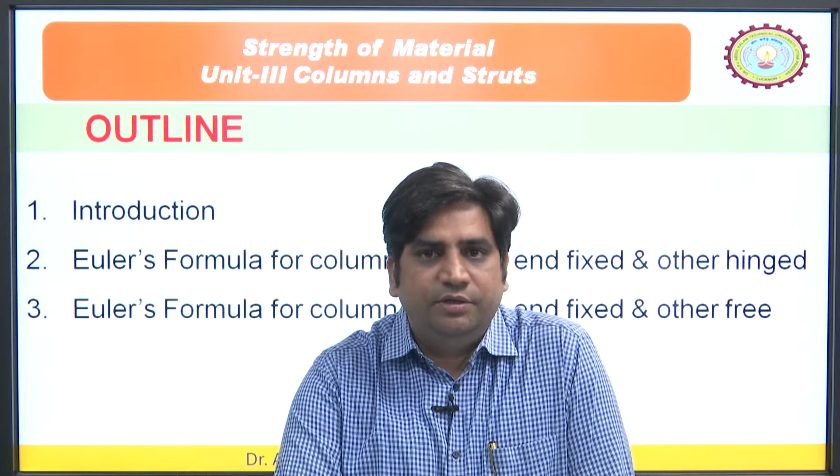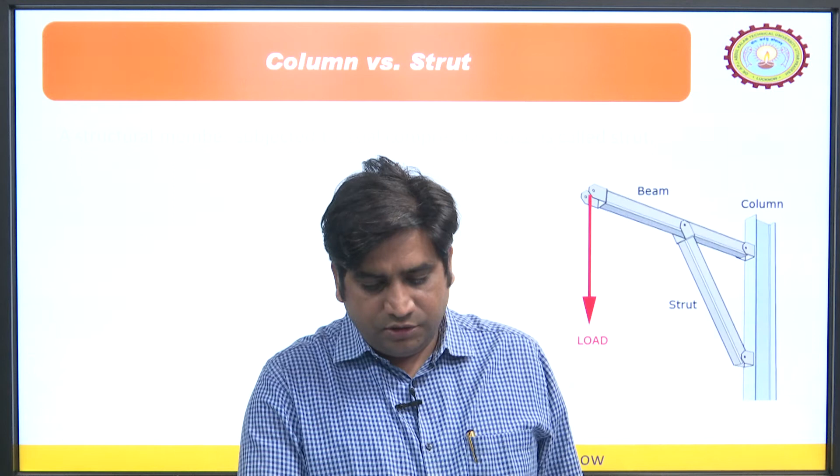As we know, columns and struts are structural members which are subjected to axial compressive force, and if any strut is acting in the vertical direction then we can call it a column.

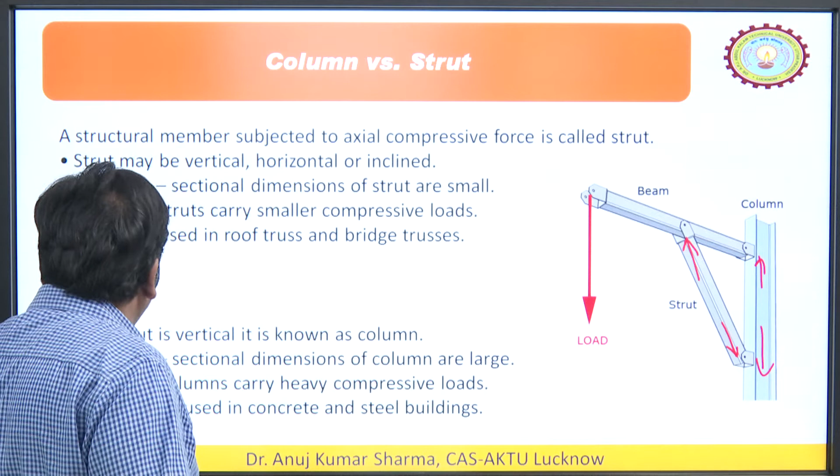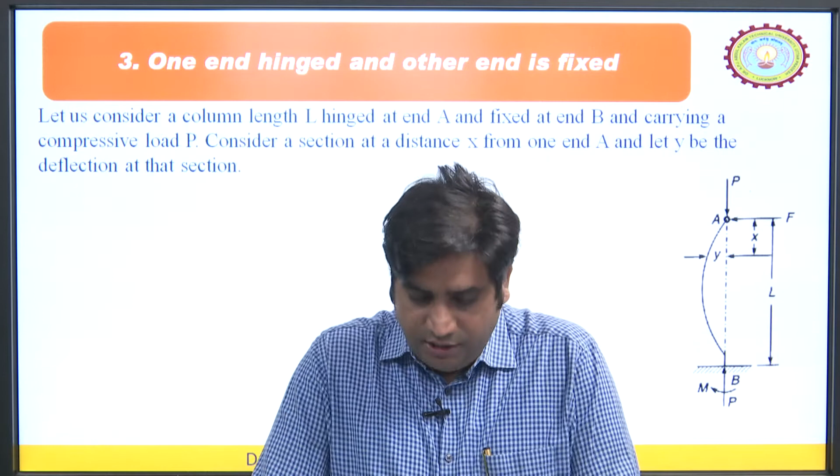So we will take this case today: one end hinged and other end fixed. As we can see from the right hand side diagram, this is the column in the vertical position, one end is hinged, other end is fixed.

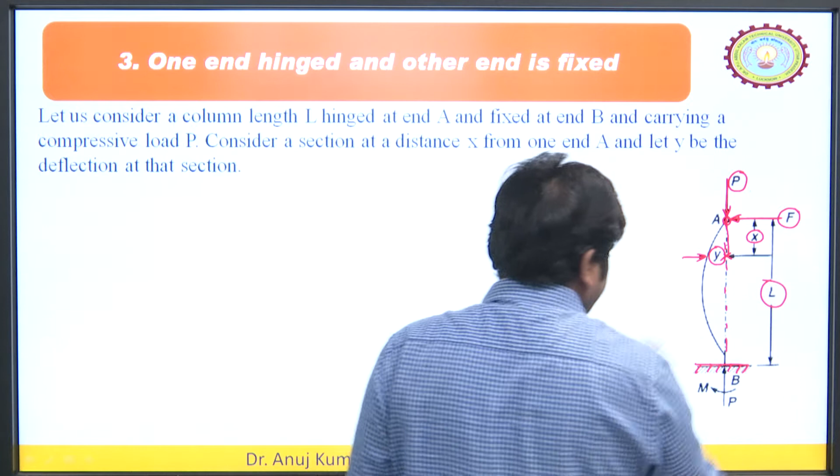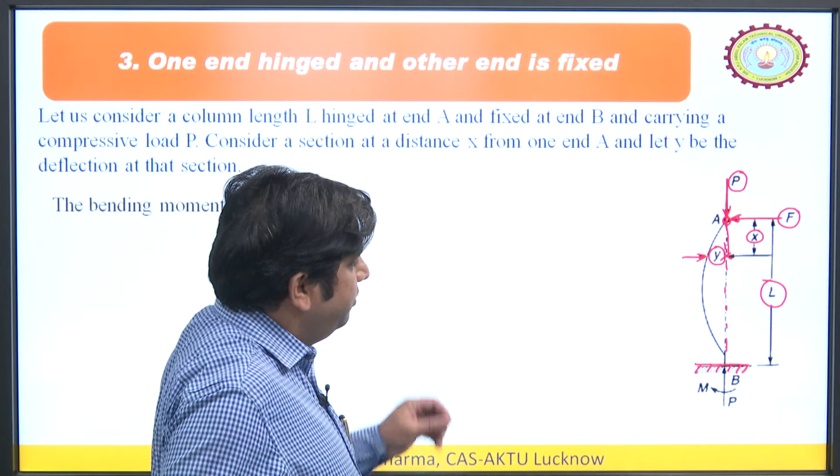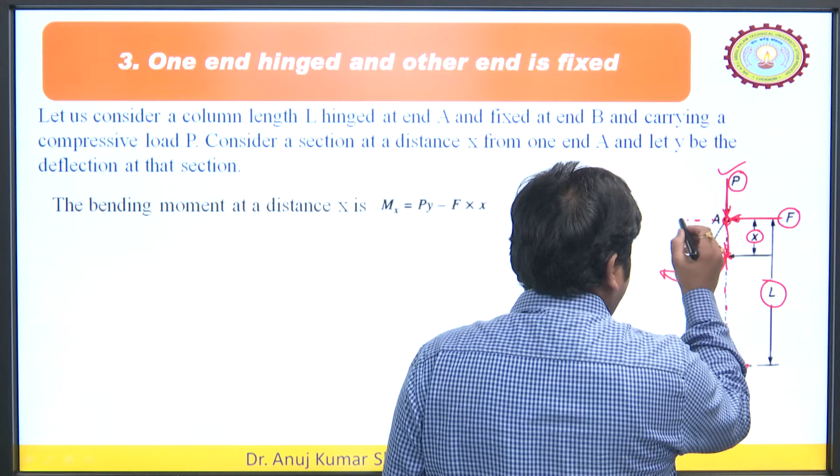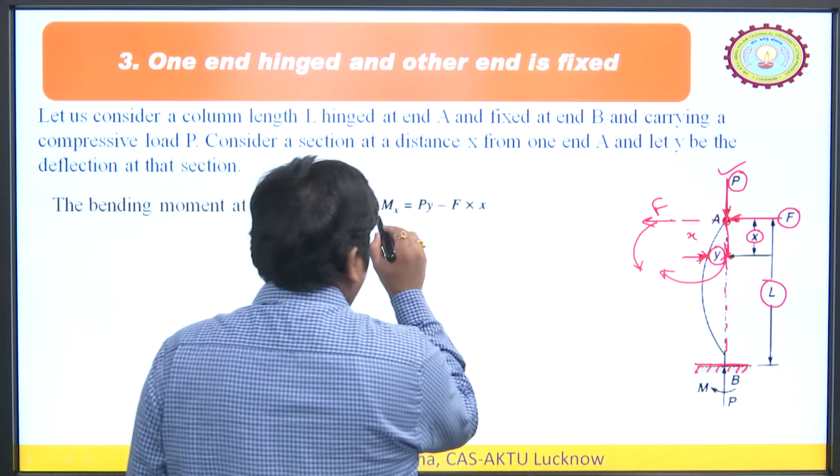If I take the moment at this point, it would be equal to P multiplied by y, in the clockwise direction, and F multiplied by x, in the anti-clockwise direction. So the net moment would be Py minus Fx.

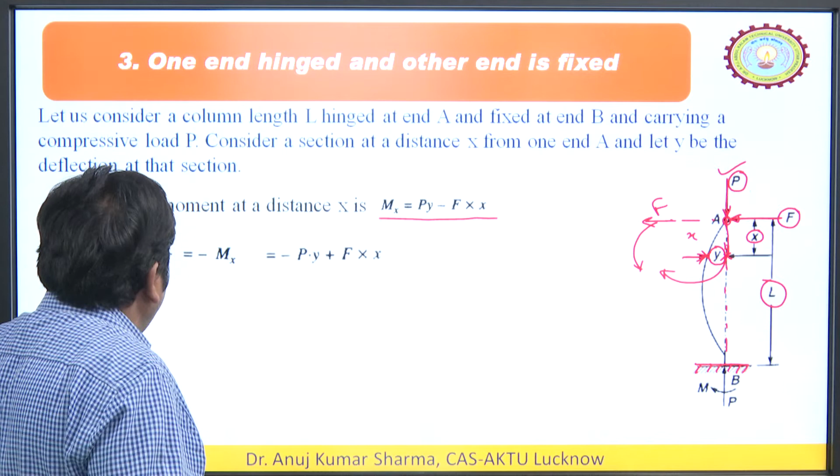We know the Euler's equation EI d square y upon dx square is equal to minus Mx. We can put the value of moment at a particular section at a distance x. If we put that, we get the equation EI d square y upon dx square is equal to minus py plus fx, because there is a minus sign there.

If we simplify this, we have moved EI to the right hand side, and then moved this term here. So what we have got is the expression d square y upon dx square plus p upon EI into y is equal to fx upon E into I.

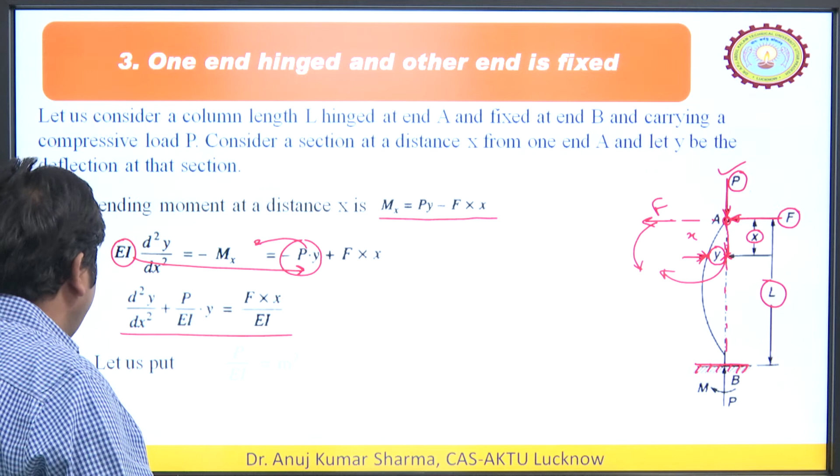Now let us make it more simple. We assume that p upon EI is equal to m square, and we put that expression in the equation. If we put it in, we get d square y upon dx square plus m square y is equal to fx upon EI. So this is the expression we got, and this is the second order differential equation.

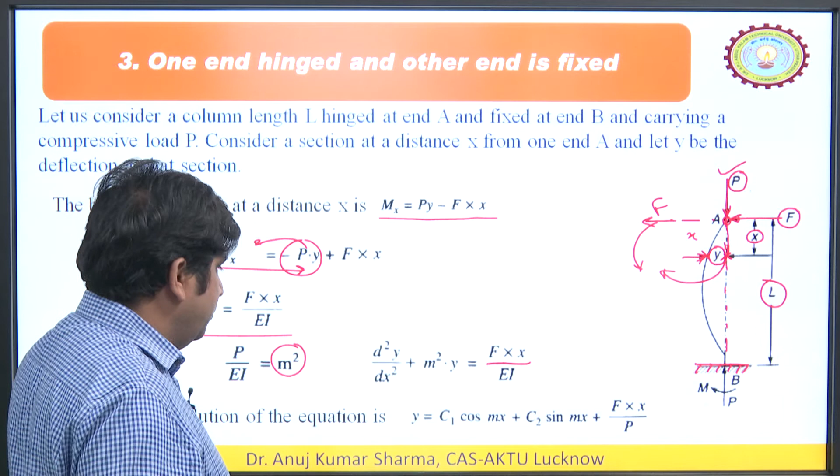We can rearrange this, or otherwise we can leave it as it is. For this second order differential equation, we can determine the general solution of this equation. The general solution may be y is equal to c1 cos mx plus c2 sin mx plus fx upon p. So this is the general solution of this equation, where c1 and c2 are constants.

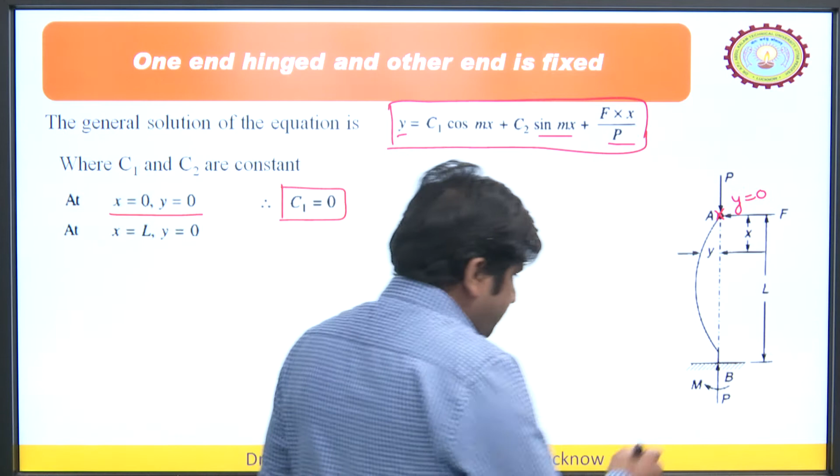Now the second condition may be at x is equal to L, meaning we are talking about this point. If we talk about this point, here also x becomes L, but y is equal to 0 again. So we can put this condition here.

If we put this condition, this will give us 0 is equal to this term cos mx, because C1 is also 0. So this is also 0, plus C2 sin ml plus FL upon P. So this is what we have got.

Now from here we can calculate dy by dx, because we have to calculate C2 in terms of some known parameters. But even f is not known to us, so we have to replace this f also. For that we can differentiate this expression.

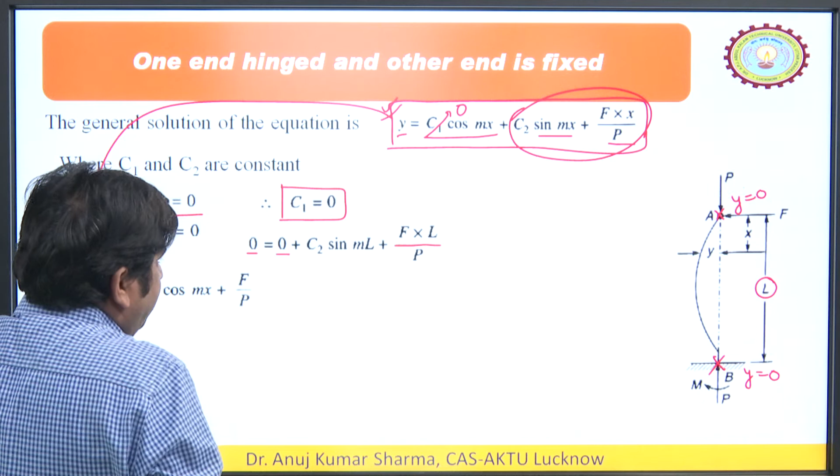If we differentiate, we get dy by dx is equal to C2 m cos mx, because C1 is already 0, so that term vanishes. We have to differentiate this term with respect to x, and after differentiation we get C2 m cos mx plus f by p.

So now we have these boundary conditions at x is equal to L. At x is equal to L, dy by dx is also equal to 0. You can see at this particular point the slope, which is dy by dx, is also 0.

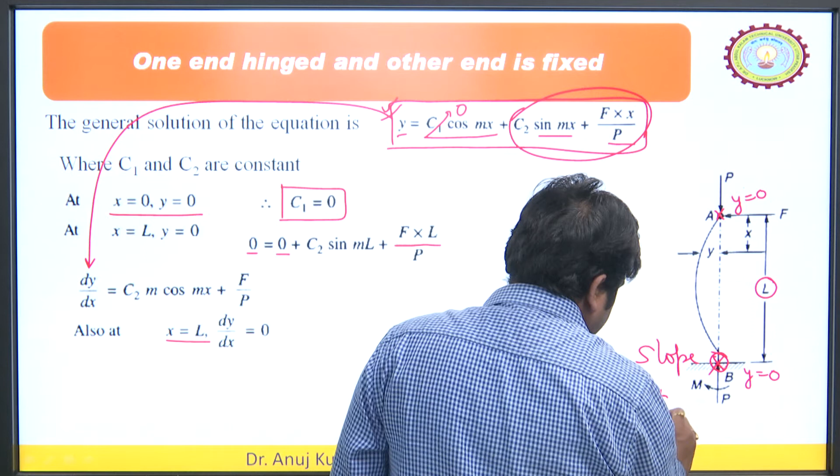So what can we do? We can put these expressions here: dy by dx is 0, equals C2 m cos ml plus f by p. If we set this equal to 0, we get C2 is equal to minus f by pm cos ml.

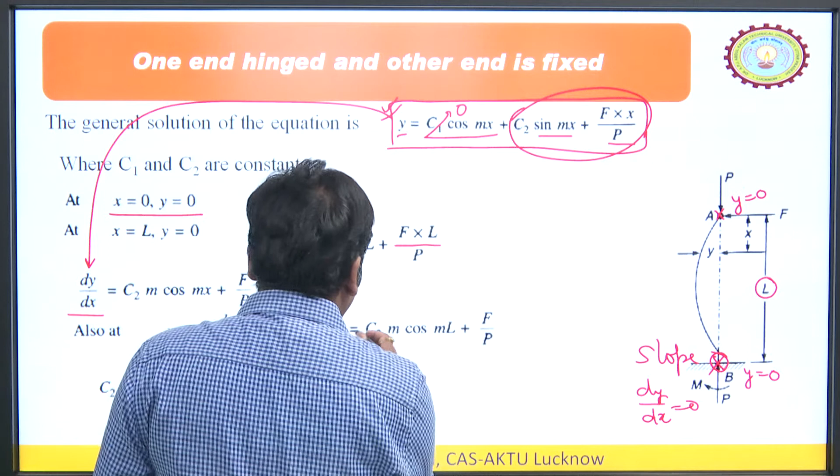If we put this equal to 0, this term will go to that side with a minus sign, divided by m, and this m will come to that side along with cos ml. So we get C2 is equal to this expression. Now we can put this C2 value into the general equation.

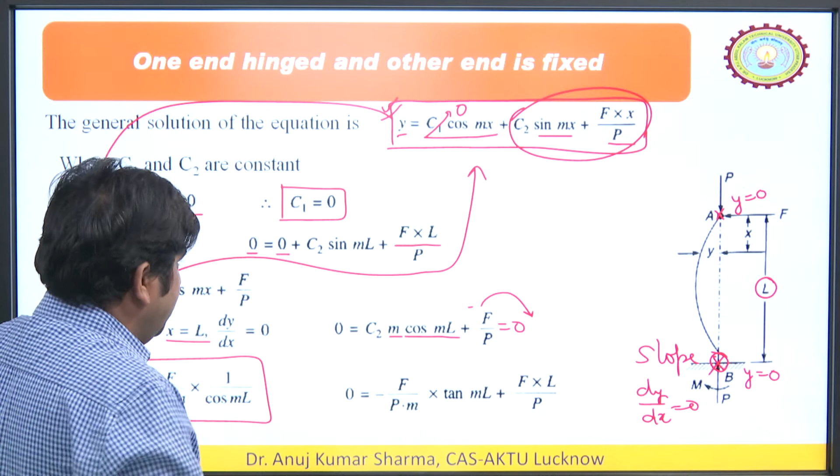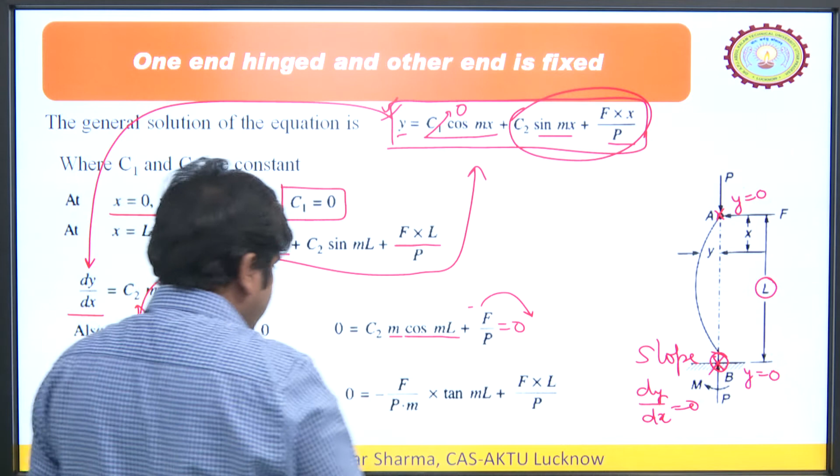So now we can get dy by dx is 0. So now what we have done, we have put this expression here, and we are getting minus C2 f by p m into 1 upon cos ml. When we put this expression here, we have to substitute it.

So what we are getting is 0 is equal to minus f by p m into sin ml divided by cos ml, because this cos ml will come from here. So what we will get is tan ml plus fl by p as it is. So this is the expression we will get.

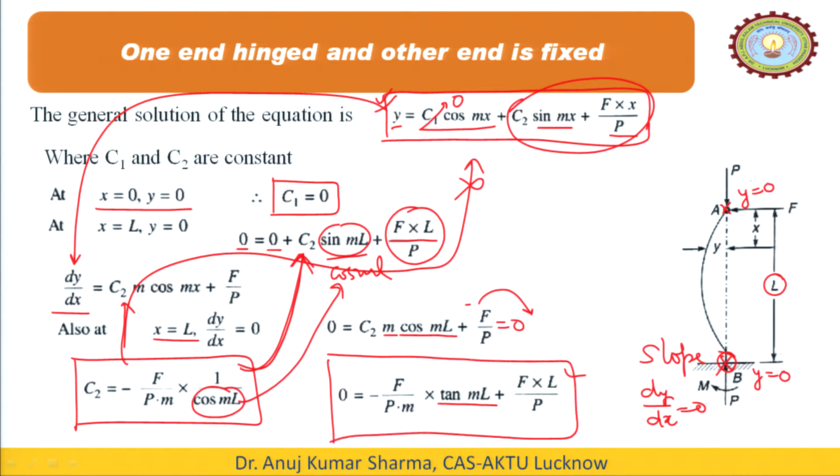Now we have to simplify this expression, because we need to calculate an expression in terms of tan ml. So this simplified expression we have got is 0 is equal to f by p, and we have taken out f by p as a common term, into L minus tan ml by m. Now if it is equal to 0, f by p cannot be 0, this term cannot be equal to 0, because f is also having some value - f is the reaction here, p is the compressive force here.

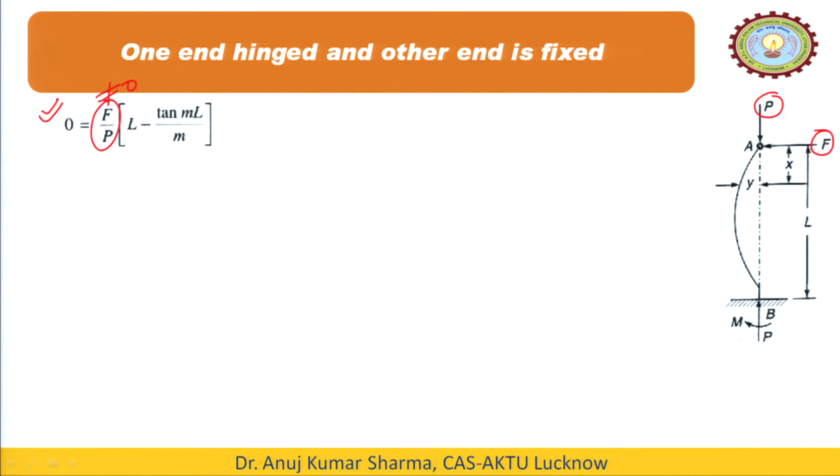So we cannot put f by p equal to 0. So what is the other option we can have? We can have the option L minus this term can be 0. So it means when we put L minus tan ml by m, that can be 0. So this is the expression. Now we can simplify it, so it would be equal to tan ml is equal to ml.

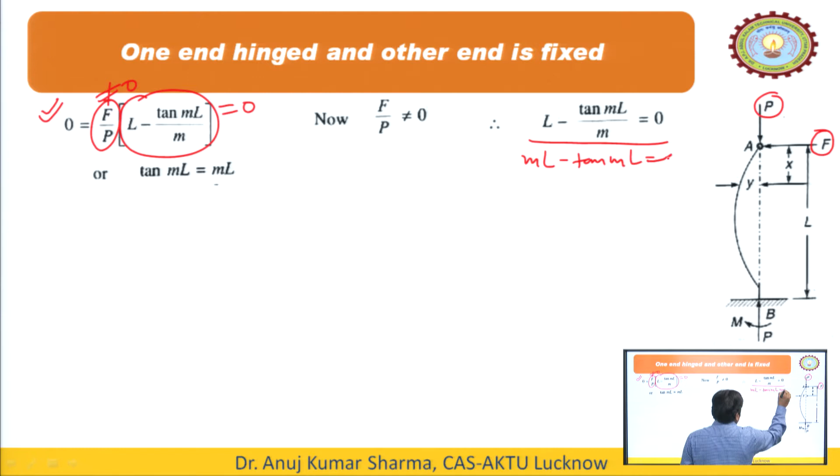So if we put it like this, we will get tan ml is equal to ml, or we can put it as tan ml minus ml equals to 0. So it means this term should be 0. So we have to find out the value of ml. How can we find out?

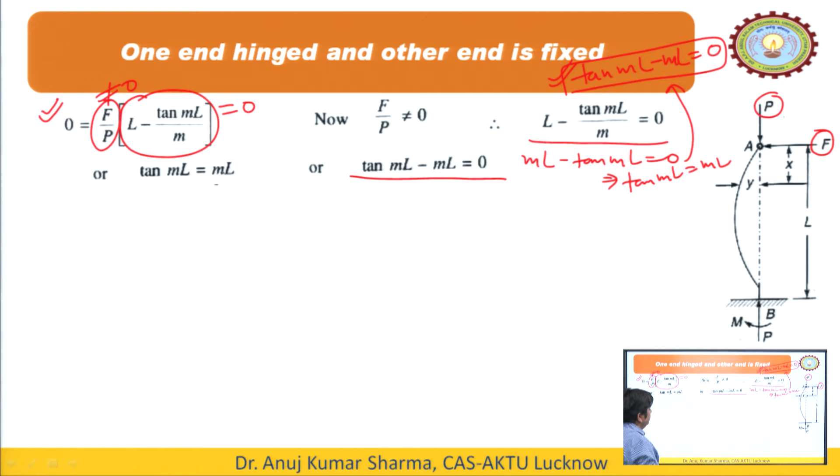So this we have got, tan ml minus ml equals to 0. So now we have to do some iterations, like this - tan ml minus ml should be 0, but when can it be 0? So we have to put some arbitrary values and check.

So we checked for ml equal to 1, and we are getting this value, but it is not 0. Then again we change the value to 2, but we got this. Again we change the value to this, we got this. Then 4, it is reducing, but when we put 5, then again we can do some iterations. So finally we got this combination.

So for ml is equal to 4.49, when this value comes, we get it close to 0 - it is 0.006775. So almost it is close to 0.

So when it comes to 0, it means we can say that ml is equal to 4.49. So this is the solution of this expression. So we have got this. So now ml is equal to 4.49, so ml - what we assumed as m - m square was equal to p upon EI.

So we have put m is equal to under root of p upon EI. So this expression we have got. Now we can square the expression. If we square both sides, we will get p upon EI L square is equal to 4.49 square, which we will see comes near about 20. So now we can write it as p is equal to 20 EI upon L square, just rearranging the terms.

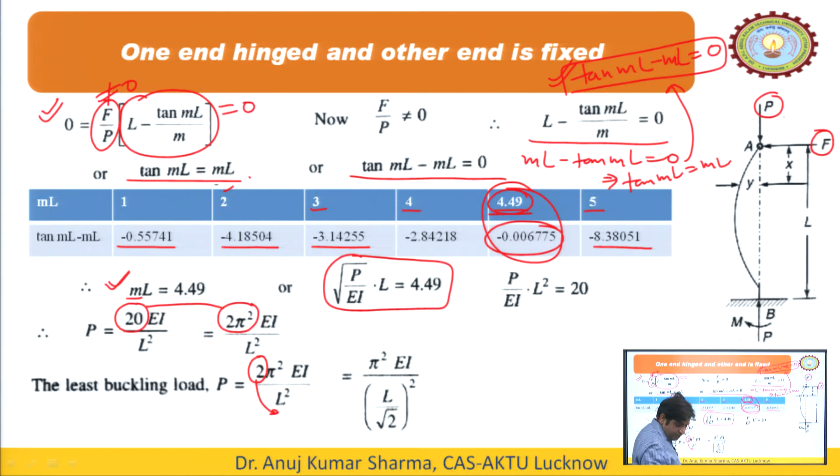So here we have to think of that standard expression. We have tried to convert it into 2 pi square EI. So we have converted this 20 into 2 pi square. When we simplify it, the least buckling load is the smallest one we have taken, because any other solutions would be higher solutions. So what we have done is bring the 2 down, take it under the root, so this will be pi square EI upon L by under root 2 square.

When we compare it with the standard solution, that is the crippling load when the column was hinged at both ends, that is the standard. So it means effective length is L by root 2 in this particular case. So for the column which is hinged at one end and fixed at the other end, the effective length is L by root 2, and the buckling load, crippling load, is pi square EI upon L by root 2 whole square.

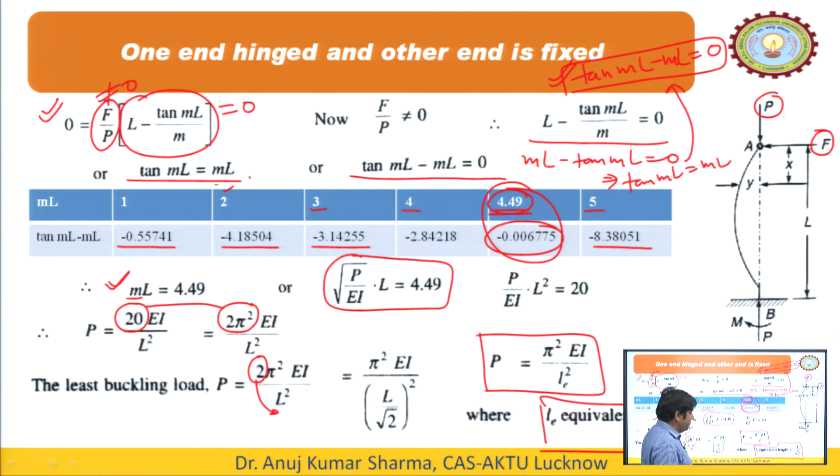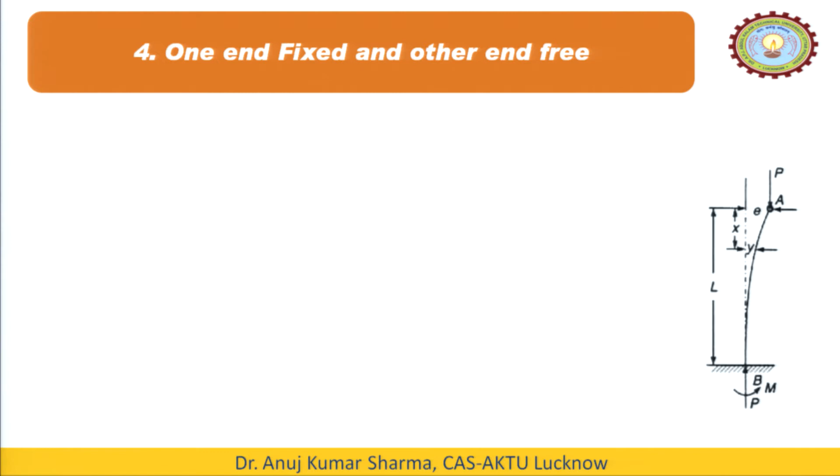So this is for the one case. Now let us take the fourth case whose one end is fixed and the other end is free. If we consider this column, here one end is fixed and the other end is free. So whenever we applied this load, we got some lateral displacement. You can see the curvature has become like this, or the column has become like this.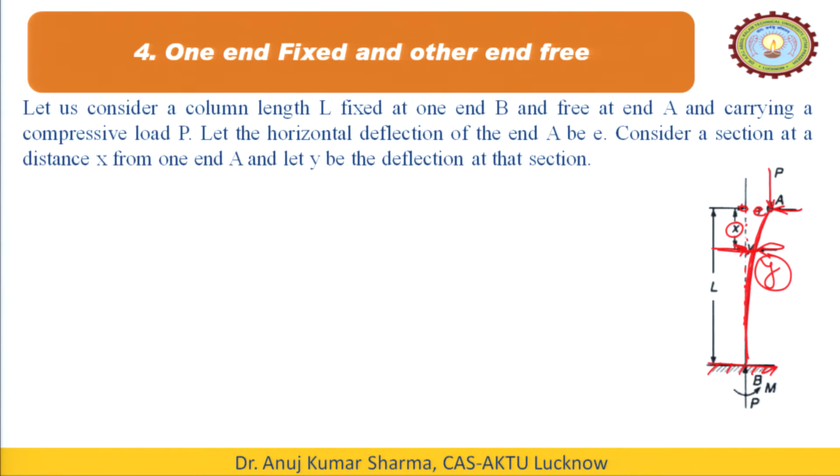So let us say at a particular point which is at a distance of x, we assume there is a deflection, let us say that deflection is y. At this point it is y deflection, and this is the eccentricity, because this end is free, so it can move in this direction or that direction, and there is no force because we do not have any horizontal reaction in this direction. So let us try to calculate the total bending moment at distance x.

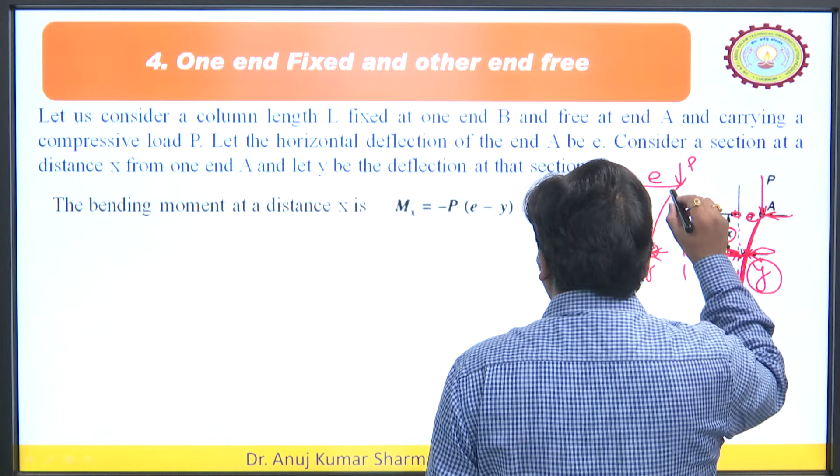Let us say this is the straight line and this is the section. Let us say this is P, this distance is E and this distance is y. So what would be the net moment if we calculate about this point? That moment would be equal to P into E clockwise and P into y, and the total distance from here to here would be equal to E minus y.

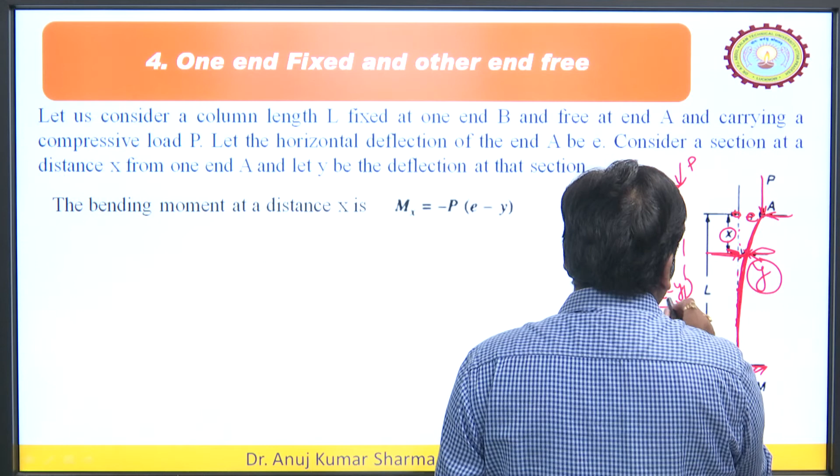So the force is P, the distance is E minus y, and it is clockwise. For compressive loading we consider it as clockwise, that is negative. So the moment is minus P into E minus y. If we see Euler's equation, EI d square y upon dx square is equal to minus mx, putting that moment here, we get P into E minus y.

Simplifying it, rearranging the terms, we get d square y upon dx square plus P upon EI into y is equal to PE upon EI. This is the term we got upon rearrangement. Now we simplify by putting P upon EI equal to m square, then this equation becomes d square y upon dx square plus m square y is equal to m square multiplied by E. This is the simple equation.

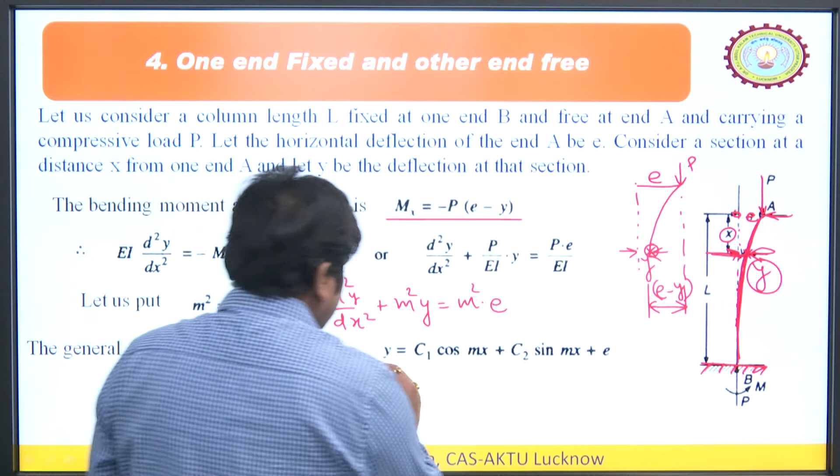Now the general solution of this equation is y is equal to C1 cos mx plus C2 sin mx plus e. This is the general solution of this equation. Now we have to look for the boundary conditions. At x is equal to L, y is equal to 0, since this end is fixed. So at x is equal to L, y is equal to 0, and we can put this expression here.

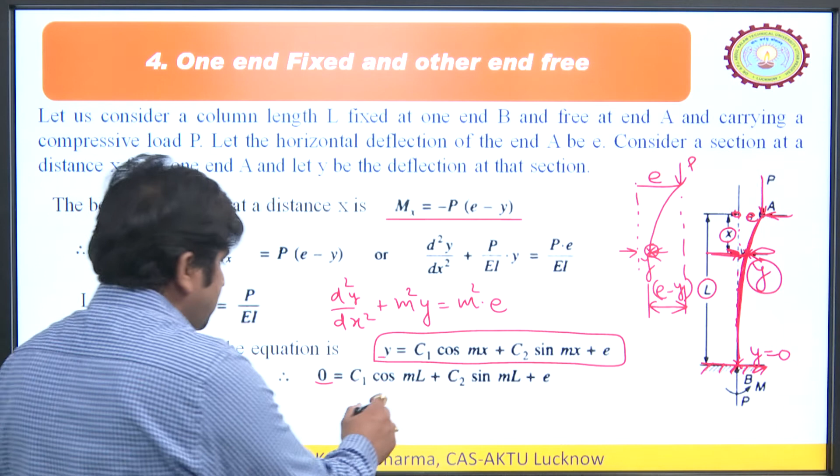In this equation, if we put x equal to L, this term becomes 0, and we get 0 is equal to C1 cos mL plus C2 sin mL plus E. So from here we have one relation between C1 and C2.

Now we can calculate dy by dx by differentiating this expression, and we get dy by dx is equal to minus C1 m sin mx plus C2 m cos mx.

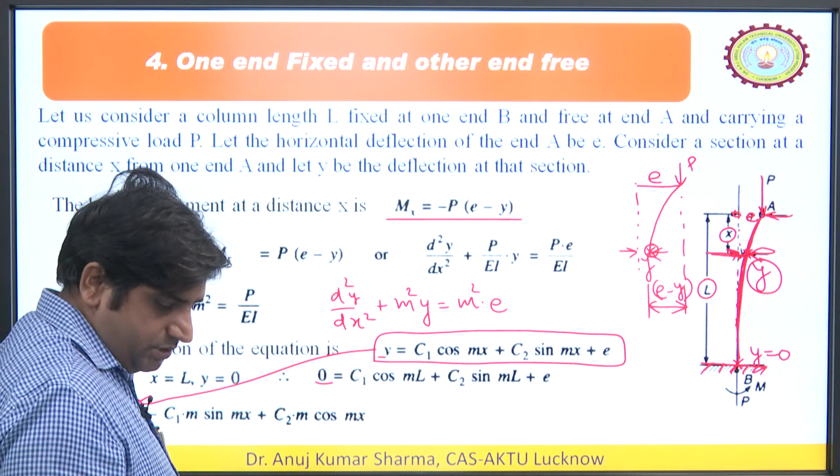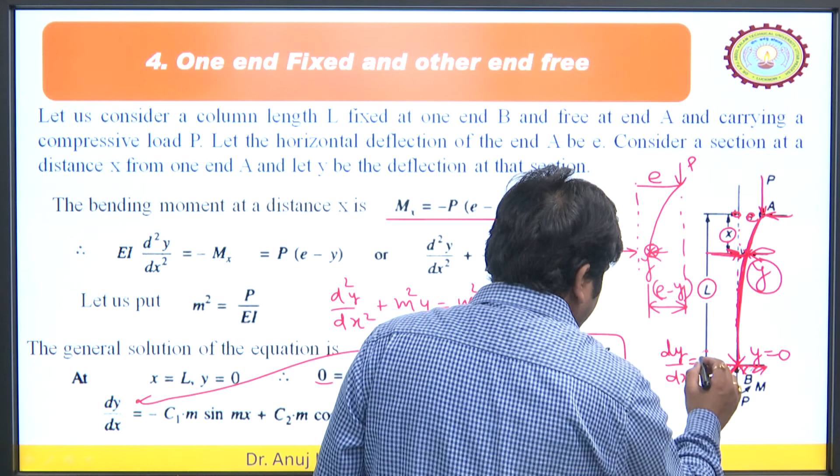Now we have another boundary condition at x is equal to L, where the slope is also 0. So dy by dx is also equal to 0. When we apply this, we get another expression, giving us another equation between C1 and C2.

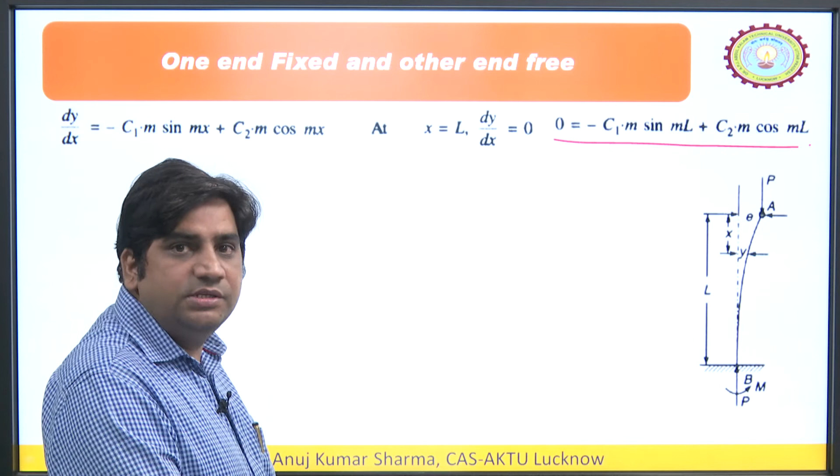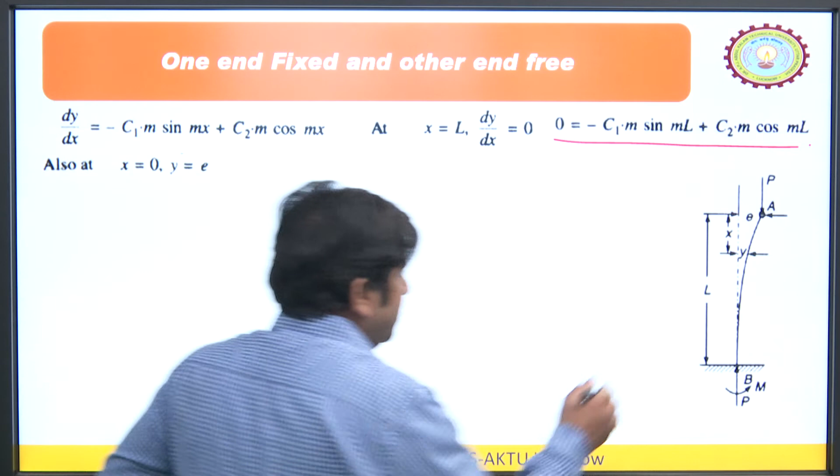This means we know 3 values: at x is equal to L, we know both slope and deflection, and at the free end at x is equal to 0, we know the lateral displacement y is equal to E. When we put all these into the expression, we get E is equal to C1 plus E, the E cancels out, and we get C1 is equal to 0.

So the first constant C1 is equal to 0. Whenever you put this into the expression, you get C2 is equal to sin mL related expression, and you get 0 is equal to minus E m by sin mL. Putting C1 as 0 and C2 as found, we get this expression.

When we solve this expression, we can get mL is equal to pi by 2, 3 pi by 2, and so on. There may be more solutions, but we have to select the lowest one.

If we generalize this, for the general solution we get mL is equal to (2n plus 1) into pi by 2. So this is the general solution.

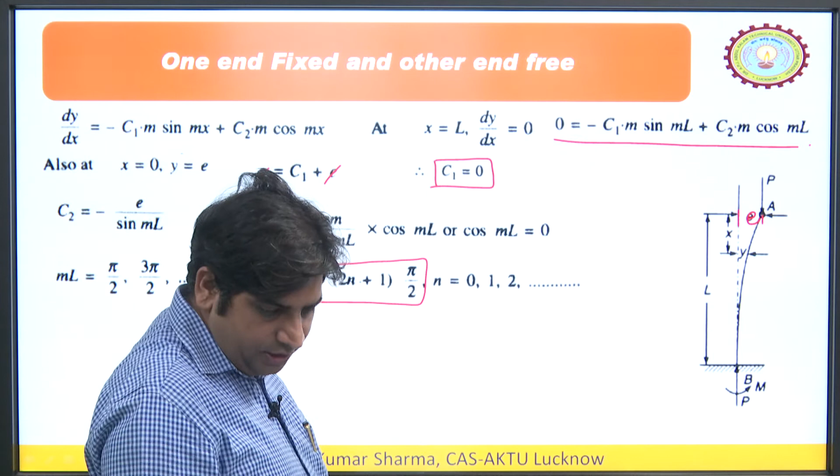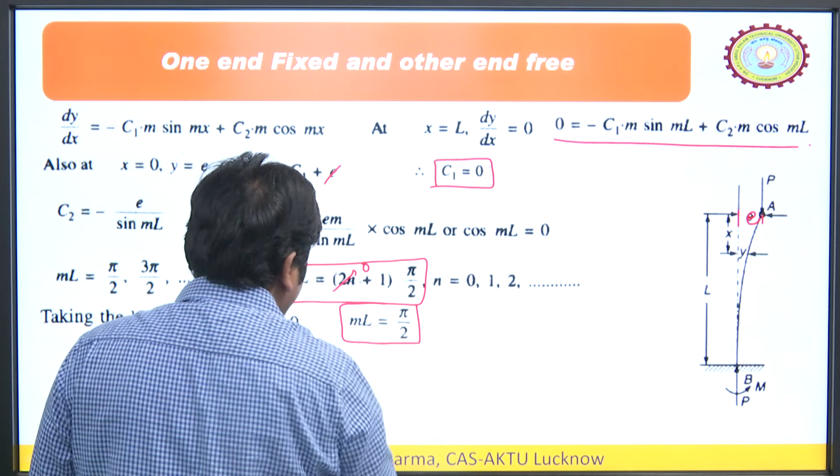So what value do we get for mL? This is the lowest value; for n is equal to 0 we would get... actually taking the least value, n is equal to 0, so mL is equal to pi by 2. When n is equal to 0, that term becomes 0 and we get only pi by 2, which is the lowest or least value of mL.

When we put this value in, we get under root P upon EI into L is equal to pi by 2, since that's what we derived. When we solve this expression by squaring, we get P is equal to pi square EI upon 4L square.

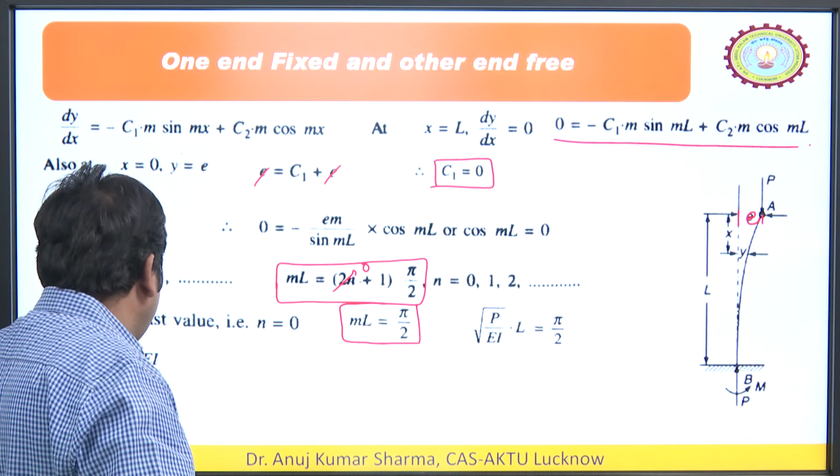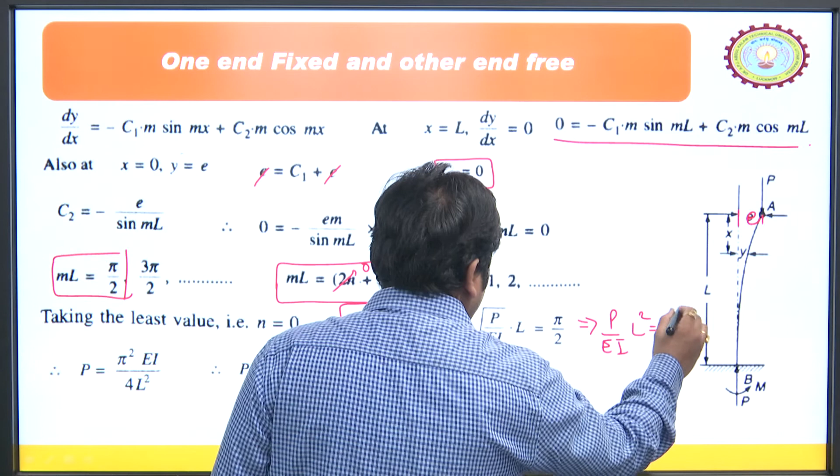When you solve this further, you get P upon EI L square is equal to pi square by 4. Rearranging, P would be equal to pi square EI upon 4L square. We know the standard crippling load equation is pi square EI upon L square, the equivalent length, so we have to convert this expression to match that square form.

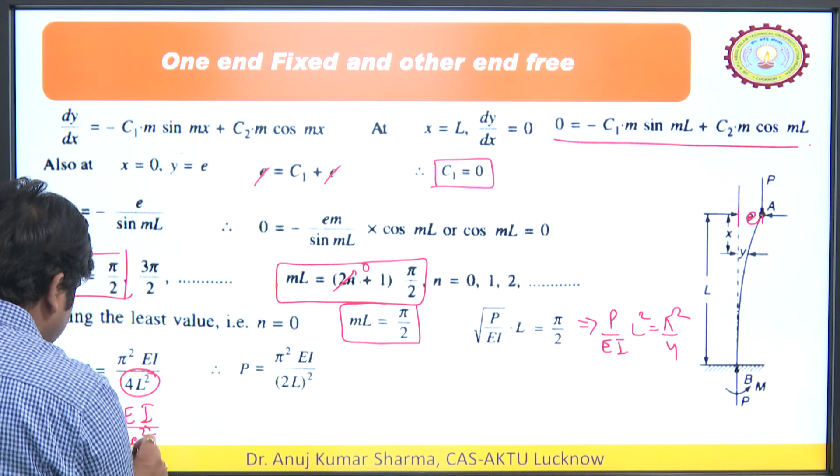So what we have done is taken the 2 inside, and written it like this. Now if we compare this expression with the standard expression, we get effective length is equal to 2L. So in this case, the effective length is equal to 2L.

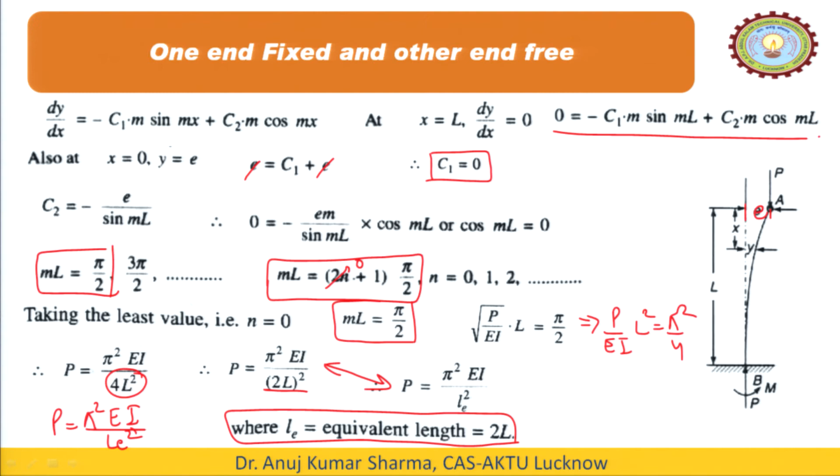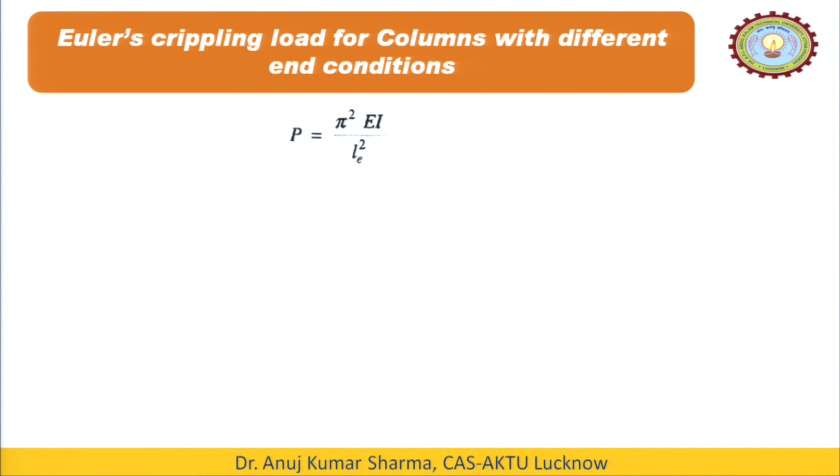So this is the expression for the column which is fixed at one end and free at the other end. We have derived this formula. Now we are in a position where we have the standard formulas for all 4 conditions of columns. If we compile this, we get Euler's crippling load for columns with different end conditions, where LE is the effective or equivalent length.

Now we can summarize, taking one by one. First, the both ends hinge condition - this is the standard case where effective length is equal to L. So this is the first condition.

Second condition is both ends fixed. Here the effective length is equal to L by 2.

So this expression we have to remember, and the third is one end fixed and the other end hinged. Here the effective length is equal to L by root 2.

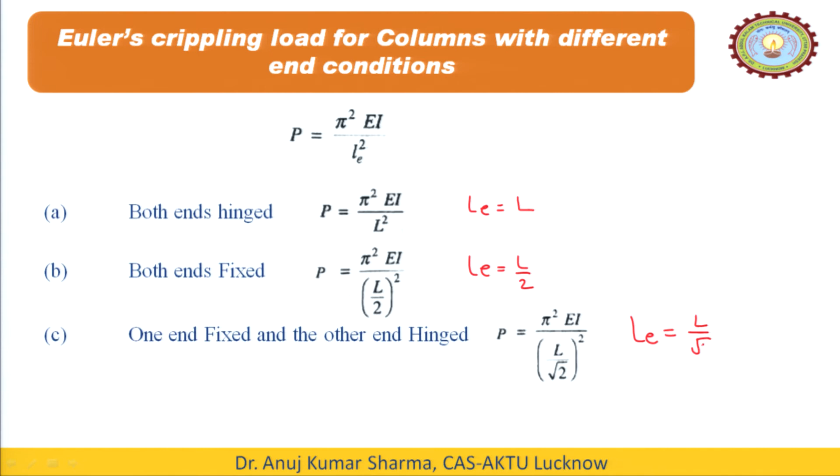Equivalent length - and if we see one end fixed, other end free, here we can see the equivalent length is equal to 2L.

So these formulas we have to remember, and this formula we need to remember. Either we remember this one formula and derive all four, or we should remember all four formulas directly. Whatever it is, it is up to you to decide and remember these things.

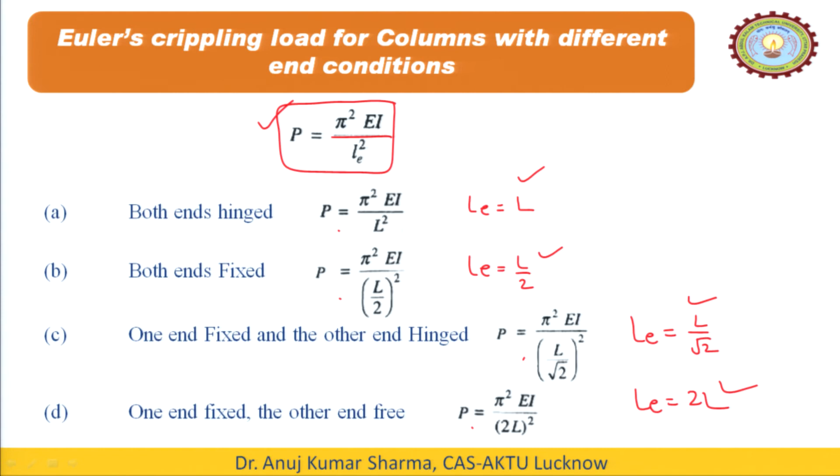Now we will take one small numerical. A straight length of steel bar 1.5 meter long, with a 2 centimeter by 0.5 centimeter cross section - this area is given - is compressed longitudinally until it buckles.

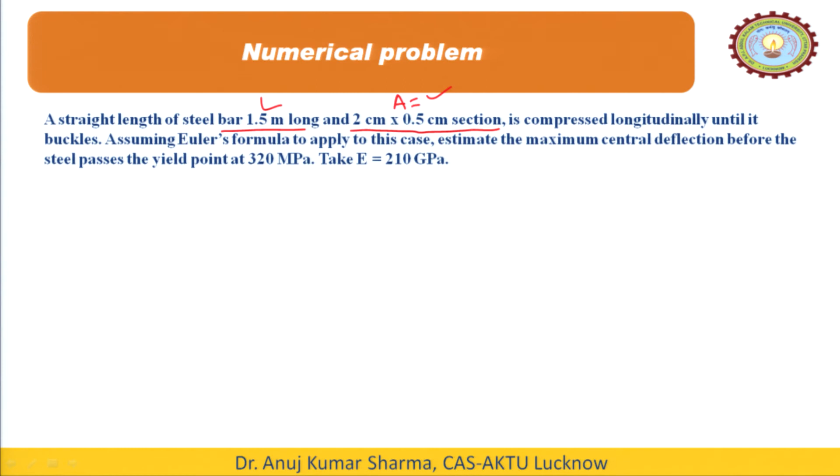We have to think of that situation where buckling is just about to start, assuming Euler's formula applies. We have to estimate the maximum central deflection, y max, before the steel passes the yield point - the maximum stress and E are given.

So this is a very simple numerical. First we calculate I minimum, the moment of inertia. Moment of inertia is B d cube by 12.

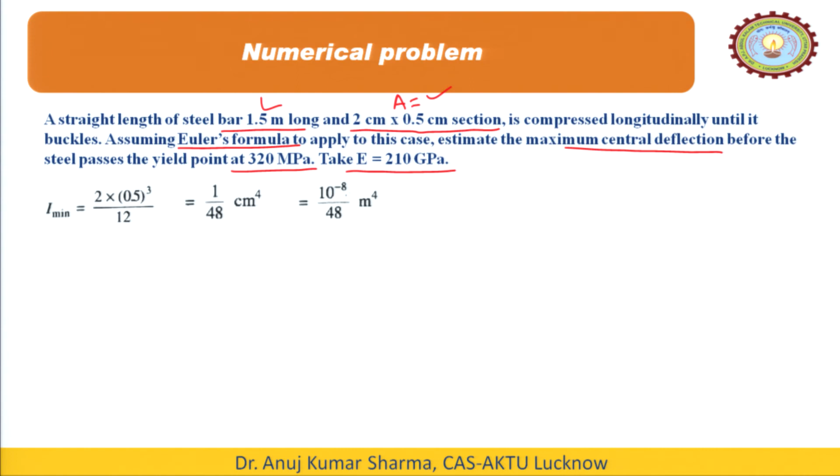The dimensions are given, so we can calculate I minimum, the moment of inertia, which is 1 by 48. Calculating further, this is 10 raised to the power minus 8 by 48 meter raised to the power 4. So this is the I, the moment of inertia we have calculated.

Now we know Euler's crippling load equation: P is equal to pi square E I upon L square. If we put in the values - E is given, I we have calculated, length is given as 1.5 meter - solving it, we get P equal to 191.9 Newton.

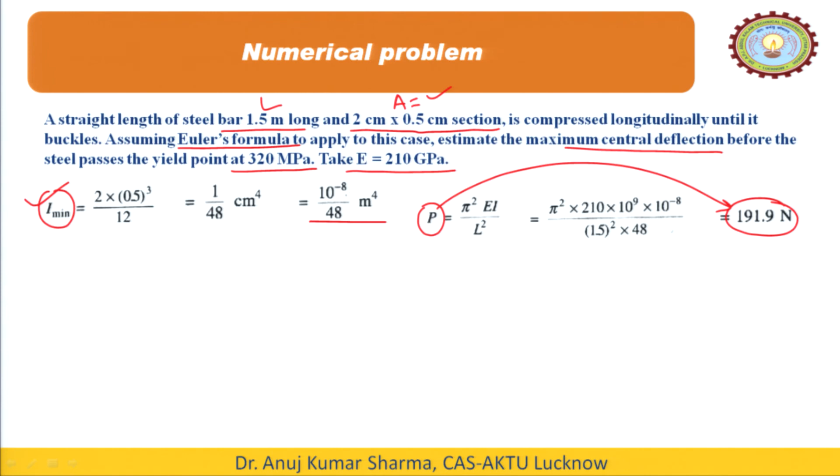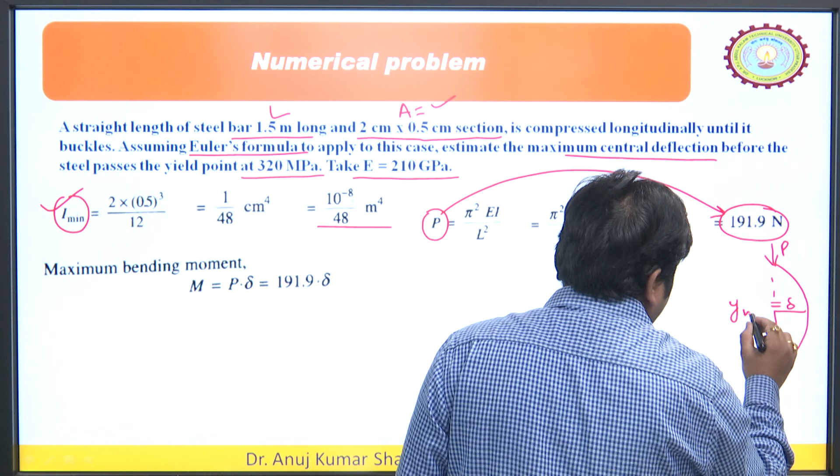Let us say delta is y maximum. So if we calculate at this particular point, the moment would be P into delta, that is 191.9 into delta. So P we have calculated, delta we need to calculate.

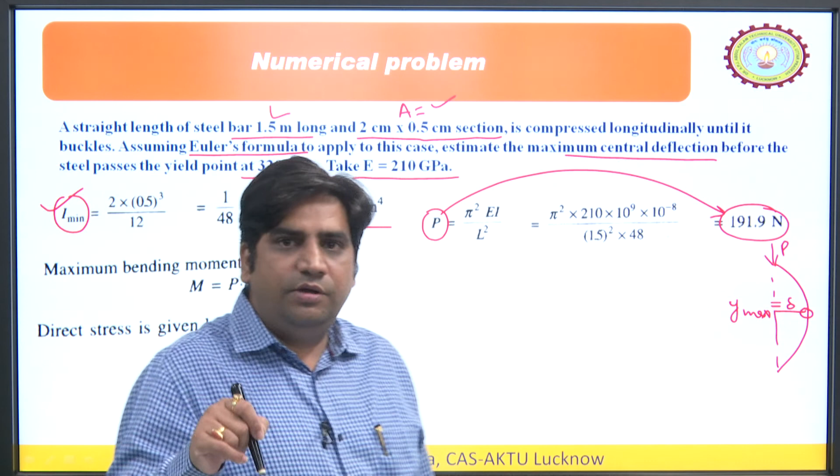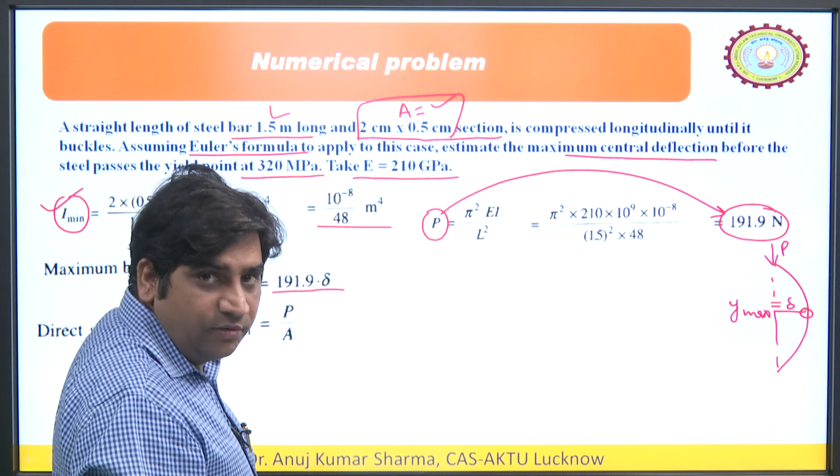Now, if we want to calculate the direct stress, it is the load divided by area. Area of the cross section of the column is given, that is 0.5 multiplied by 2. We can divide P by A to calculate the direct stress: sigma 1 is equal to 191.9 upon 2 into 0.5 into 10 raised to the power minus 4. Like this we can calculate, the direct stress is 1.919 megapascal.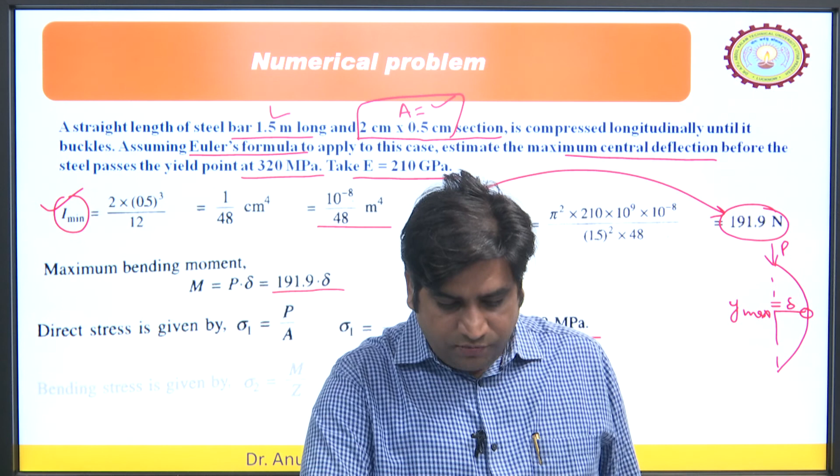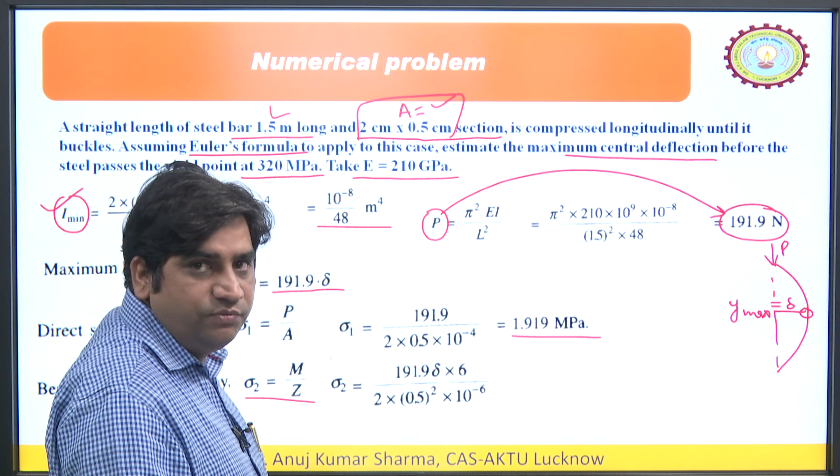Now bending stress is given by sigma equals bending moment equation, m by z. So sigma 2 is equal to m by z. Bending moment is 191.9 into delta, 6 is given, and z is I by y. I we have calculated, y max would be equal to 0.5.

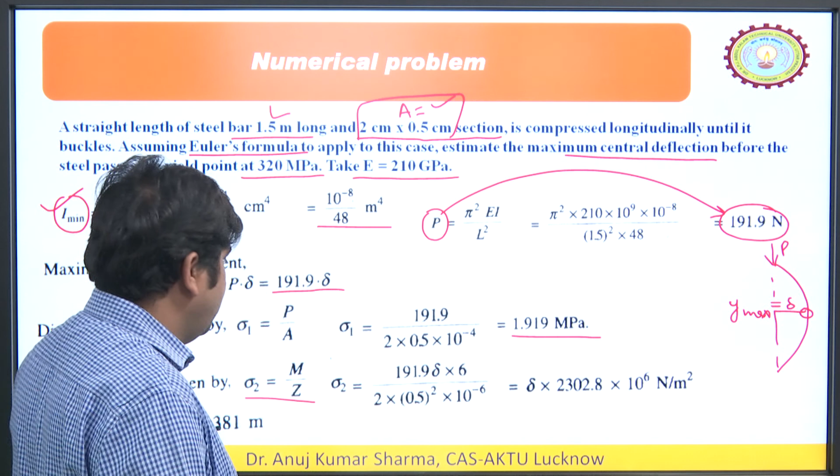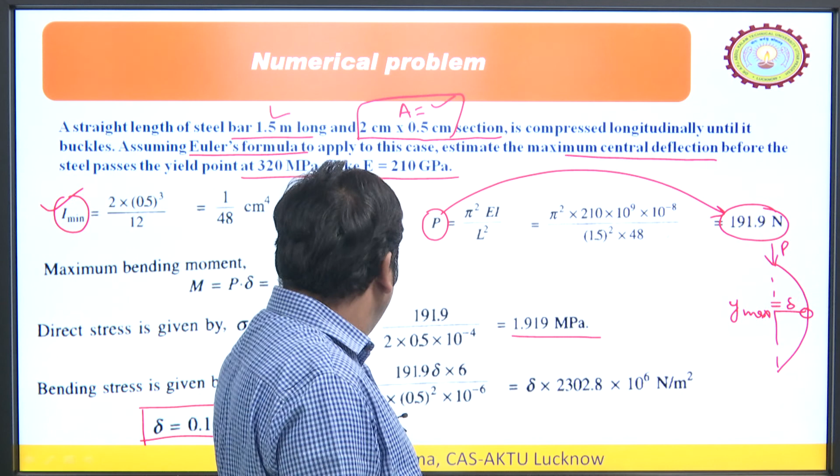So like this we have worked it out, and in terms of delta, the equation for sigma 2 comes out. So delta is how much? From here we solve for delta, and we can calculate it as 0.1381 meter. So likewise we can calculate the maximum deflection.

So in this particular lecture we have discussed two columns with different end conditions - these crippling Euler's crippling load conditions for columns having different end conditions. Now we have calculated these, and you can try the numericals at home. Thank you listeners for this lecture.